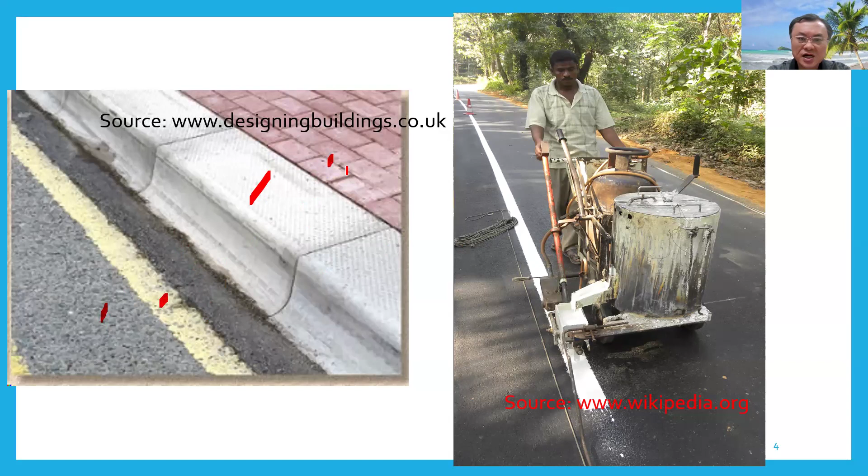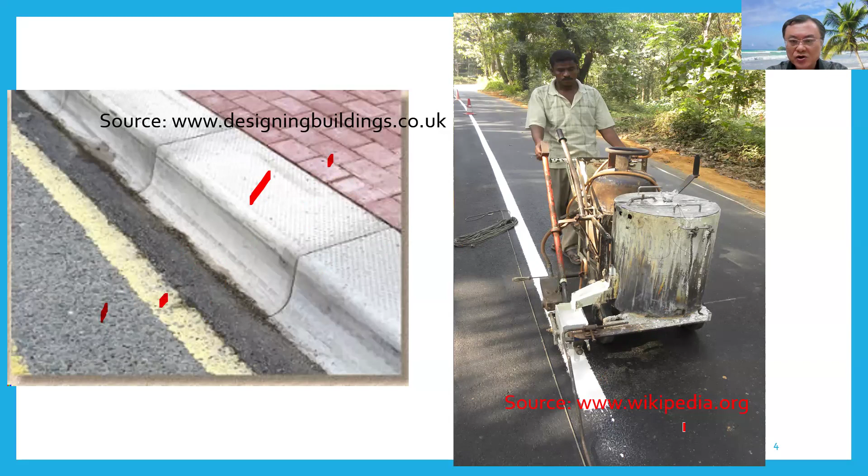On the right hand side, you can see workers preparing the road marking paint on the completed road surface.

On the left hand side, you can see this typical cross section of a normal road. So normally the lowest level is called a subgrade. It's normally the existing ground, provided it's hard enough. If it's not, it will be excavated and replaced with hard materials.

So if that's the case, then it will normally be a thickness of about 150 to 300. We call it subgrade, that's the part of ground where the base, subbase, and asphalt layers are placed on it.

These layers must be very strong because it's going to support all the heavy premix layers and the base course on top of it.

So the next layer will be the sub base course, or we normally call it the base course. The thickness will normally vary from 100 to 300. So the sub base is the layer of aggregate that lies below the base course and usually consists of crushed aggregate or gravels.

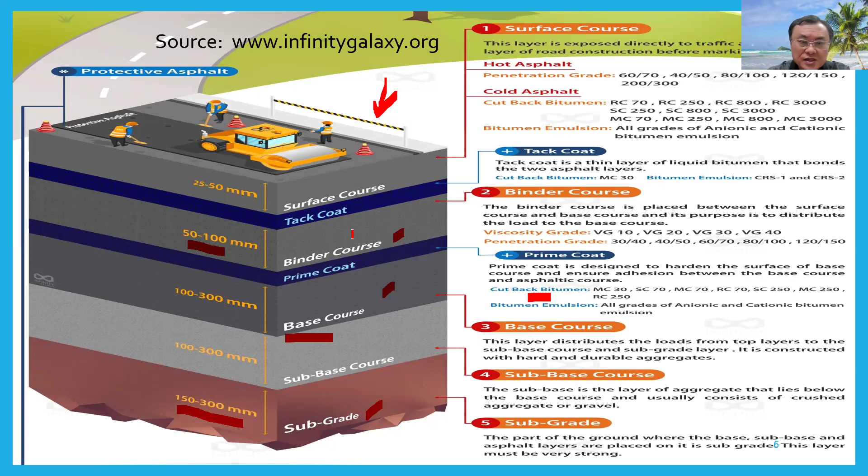So thickness normally varies from 50 to 100 mm. The binder course is placed between the surface course and base course, and its purpose is to distribute the loads to the base course. Normally in Malaysia we use premix, or bitumen mixed with the aggregates, to form this binder course. After this layer is laid and compacted with the rollers, then we lay another layer.

We call this a tack coat. This is also a cutback bitumen. The tack coat is a thin layer of liquid bitumen that bonds the two asphaltic layers, the wearing course or surface course, and the binder course together, so that ultimately they form one cohesive structure.

After the tack coat is laid, you will have a surface course, or in Malaysia we normally call it wearing course. The thickness will vary from 25 to 50, and it could be up to 100, depending on the usage of the roads. This layer is exposed directly to traffic, and it is the last layer of road construction before markings are applied.

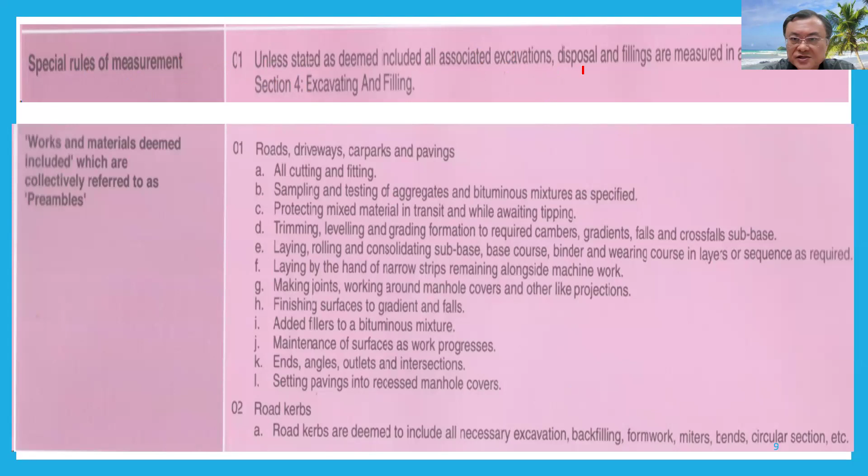For a start, we jump to the special rules of measurement. C1: unless stated as deemed included, all associated excavations, disposal, and fillings are measured in accordance with work section 4, excavating and filling. Then we come to the next section.

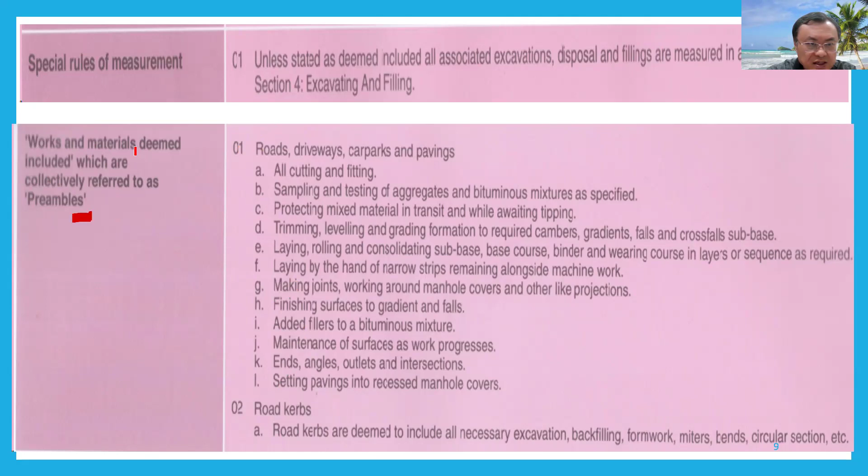Work and materials deemed included, which are collectively referred to as preambles. Meaning, whatever is mentioned here need not be measured in the quantities. The keyword is deemed to be included. I'm not going to go through it, but just roughly mention: it involves all cutting and fitting, sampling, trimming, rolling, etc.

Part 2, road curbs. Road curbs are deemed to include; the word deemed means understood to include. All necessary excavations, backfilling, formwork, miters, miter meaning forming corners, ends, circular sections, etc.

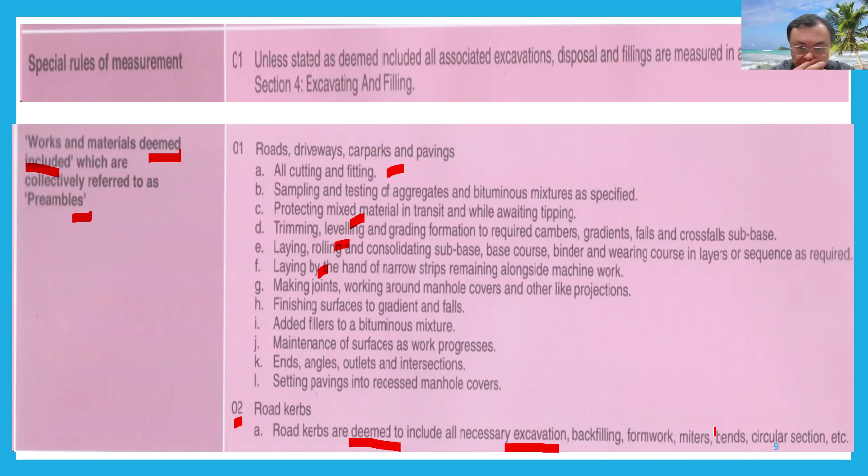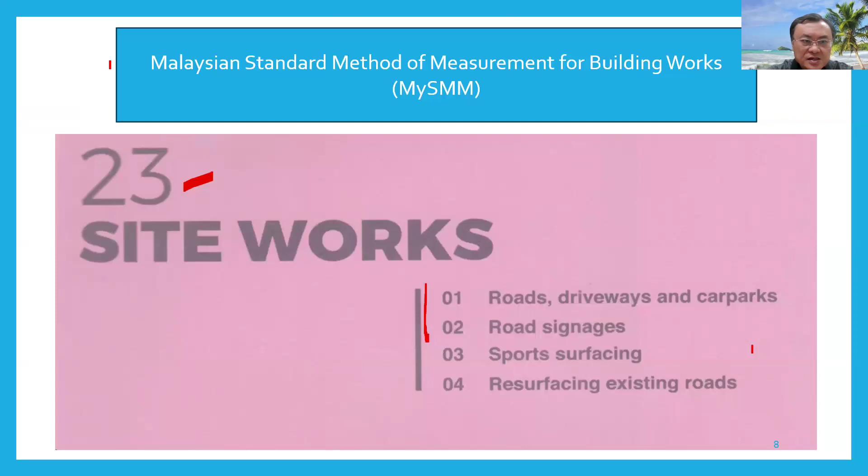You can see here the MySMM is divided into level 1, level 2, and level 3 of division. When we form a description, we make use of part 1, then part 2, then add level 1, level 2, level 3. So here we have 5 levels, but for the code of the MySMM you need 6 levels. The first one will be section 23, so we start off with 23.01.01, etc.

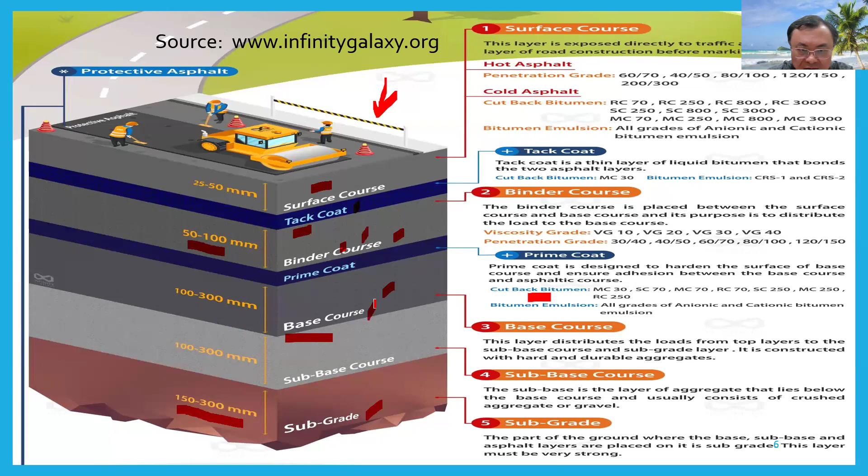Again here I noticed there's a typo, because it says asphalt concrete wearing course, blah blah blah, then at the end including a layer of approved prime coat, which is redundant because we have already measured the prime coat here. You do not measure it one more time. So this is a typo error, and I cancel it off.

Next, under part 10, on the fifth line, it says forming, for the extruded curb, forming outlet opening at center, which means you form an opening at every length, which is not correct.

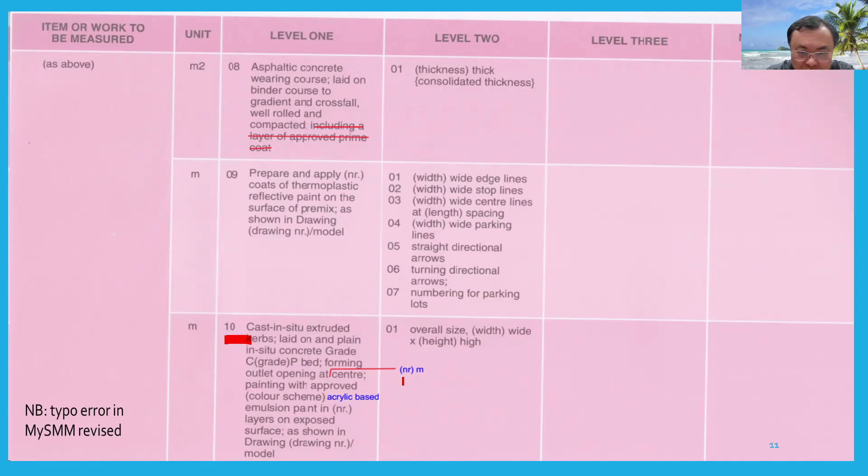Okay, that's why I add in the word number. Okay, meter, meaning you're forming the opening at how many meters centers.

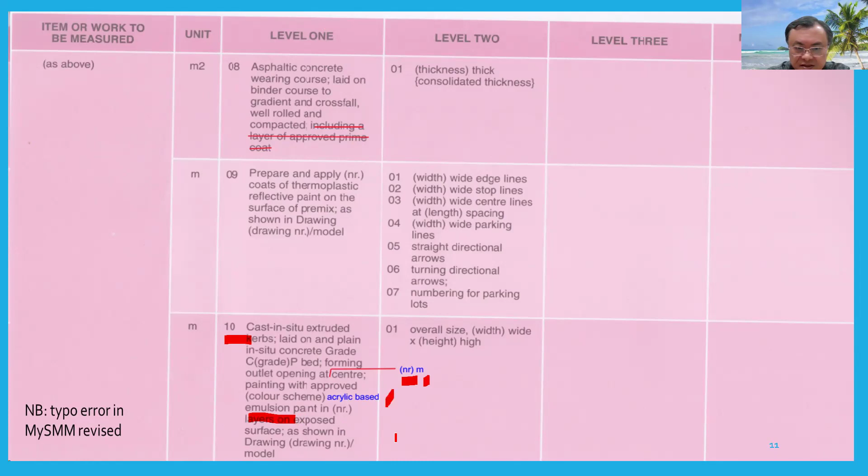Okay. The next thing is the emulsion paint. It just says painting with approved emulsion paint, which is misleading, because emulsion paint has two types. One is the acrylic, which is water resistant. The other type is the water based. For the road surface, you cannot use the water based. That's why I add in the word acrylic based emulsion paint. This will make it very clear for contractor supplies.

Okay, next, again, there's some typo error here. So you can see here, rounded on one edge, cast inconvenient. It should be cast in convenient. The word inconvenient is in convenient, two words. Okay, lengths jointed, blah blah blah. Okay. Same thing here.

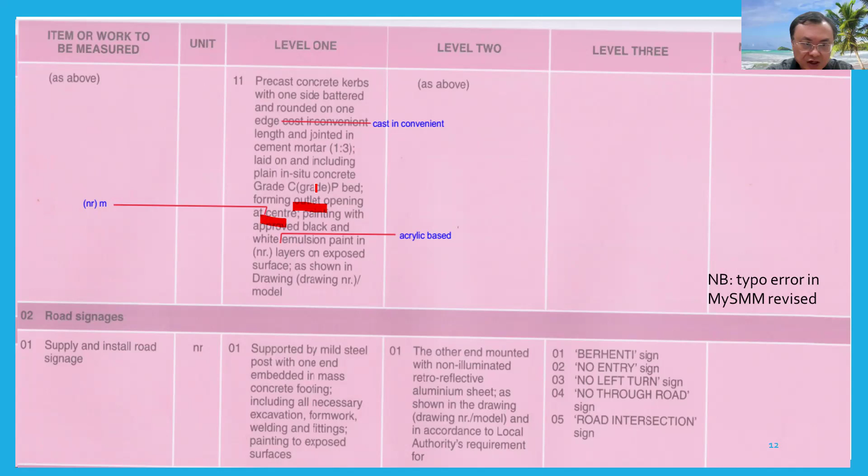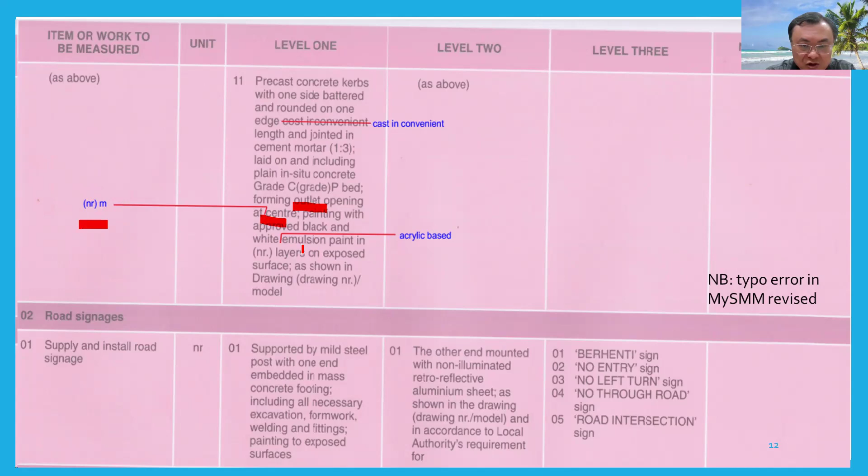Forming outlet opening. Okay, at what center? You don't have an opening at every length of the precast concrete. So I add in that it should be how many meter centers. Okay. So same thing for the emulsion paint. As I explained just now, I clarify it to be acrylic based emulsion paint. All right.

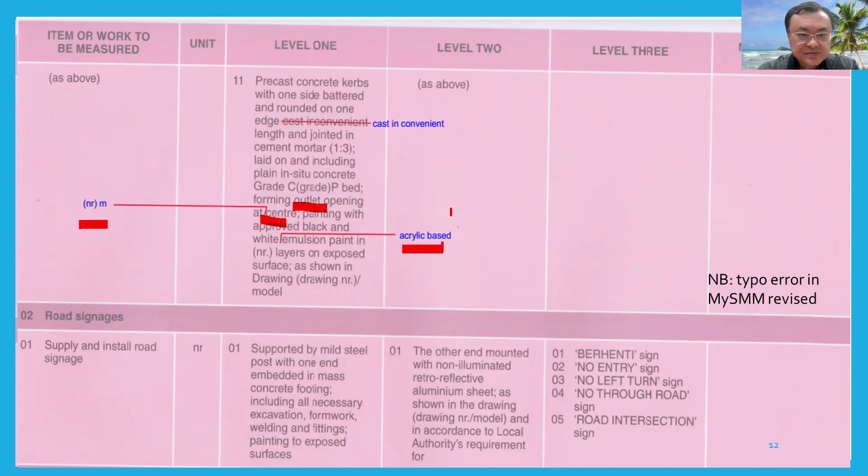So this is the main process that we are going to use. I don't want to go through it, but I will make use of it as I do the measurement. Basically, when we are constructing the descriptions of the measurement for each item, we will make use of this coding. So the first will be the section. Next will be the roads and driveway, part one, then part two. Normally the section name will not be mentioned in the description itself, because it will normally form the element name.

So this will be the unit that we are going to use for each respective item. So let's say, for example, the first item we can use road, driveway, and car parks. Then bulk excavation, blah blah blah. Then follow for the level 2, oversite, everything. So for the third level, there's nothing, so we put the code as 00.

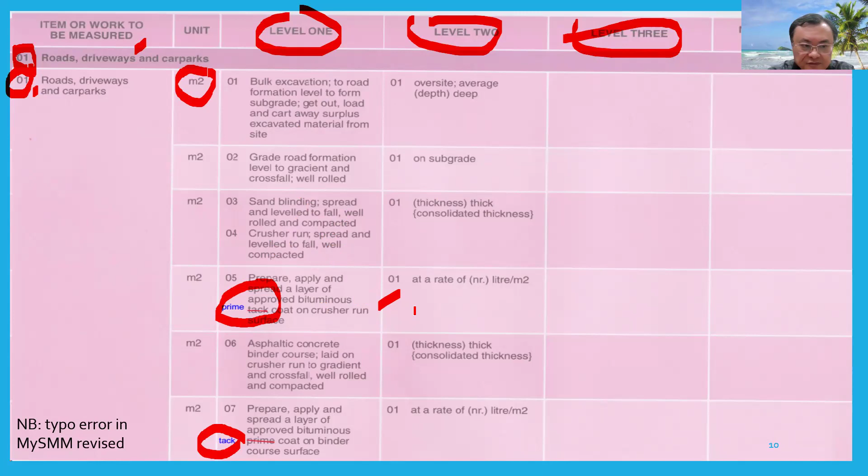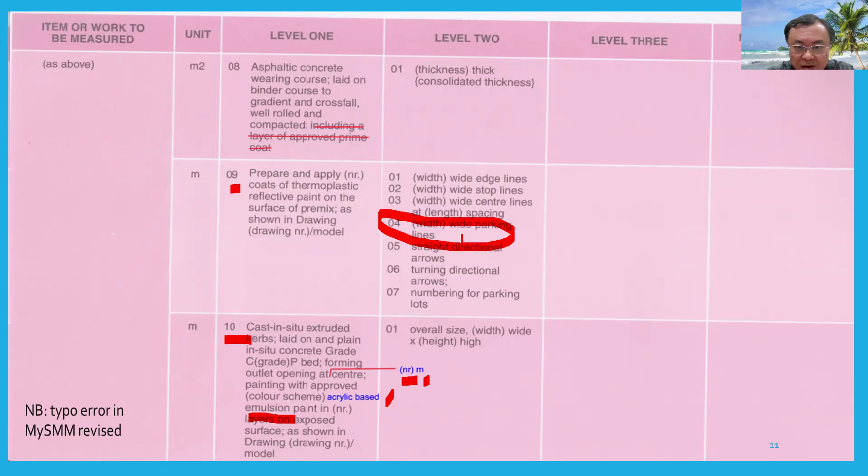So let's continue. I will not go through the individual items, because I believe the wordings are very clearly and easily understood. So I will go through it when we form the wordings of the items itself. So for example, if you want to use this item, you will just add up the above, at 09, then add individual 04 for parking lines, etc.

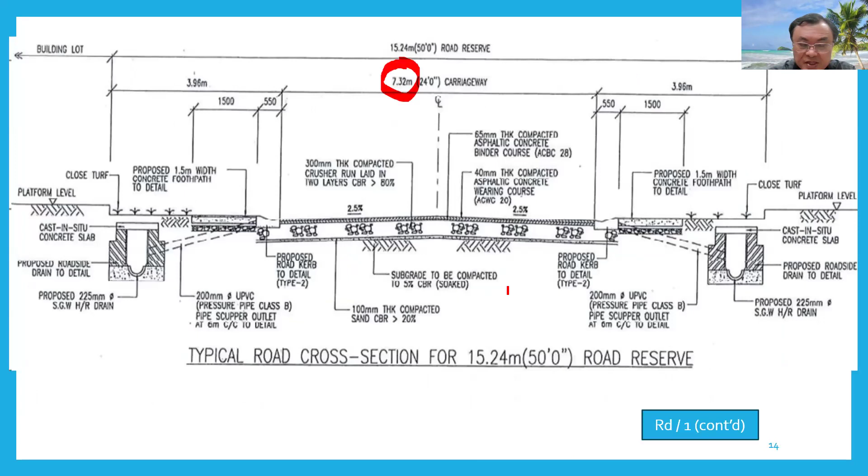So this is a typical cross section of road. You can see here this is the actual carriageway, meaning the actual premix surface, which is this width. So the road sections basically will be the same. It's just the difference in the width of the carriageway and the width of the respective road reserve.

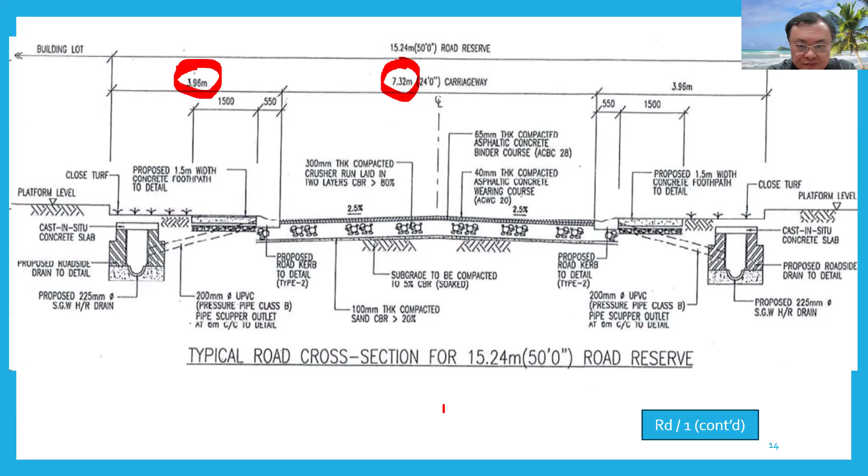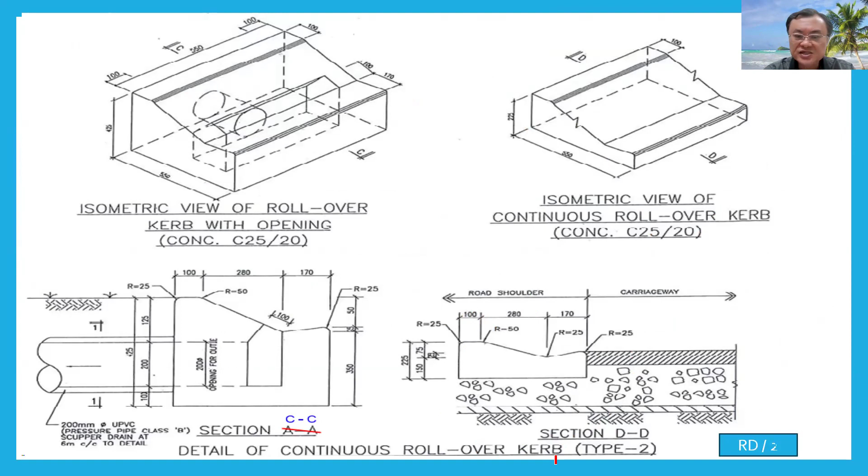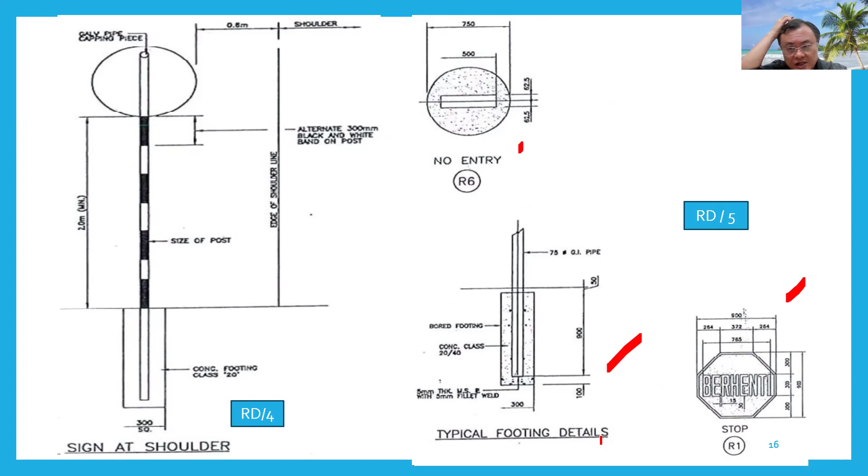Next, what you see here is the typical section of a rollover kerb, meaning the cast in situ road kerbs. What you see here is the standard construction details of a signage, for example, no entry sign, berhenti sign, and what you see here is the typical footing details.

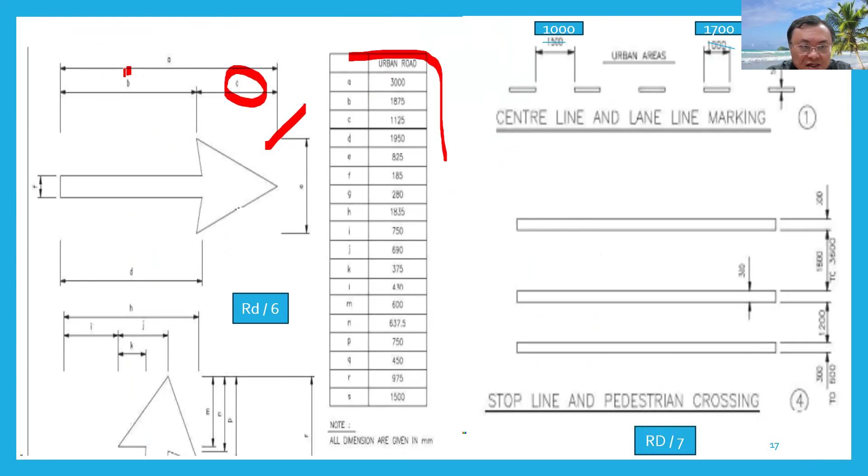So this is the direction arrow that later we're going to measure. This is all the dimensions which you are going to use to form this directional arrow. These are the stop line and pedestrian crossing line, etc. This is the one that we are going to measure, center line and lane marking. Okay, and you can see here.

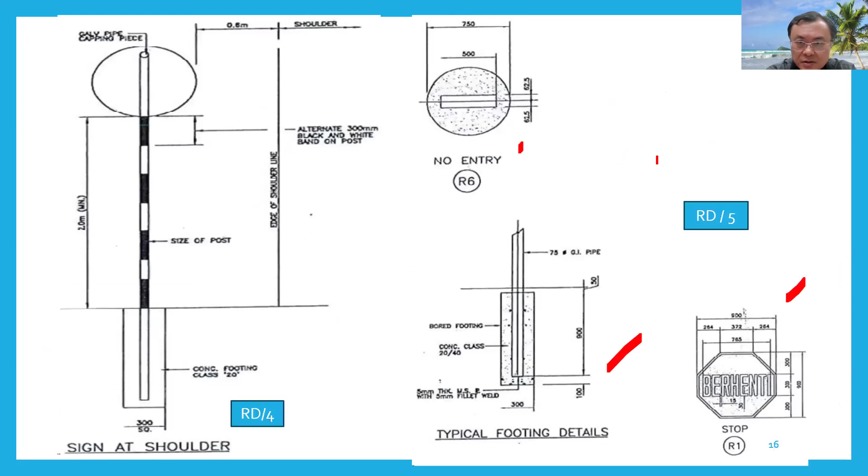Just now on the layout plan, you can see here it shows center line bracket 1000 stroke 1700. You can see here the gap is roughly about half of the road marking. So the gap should be 1000. The actual line over here will be 1700. So that's why I have amended this to reflect what we are going to measure later.

Okay, the gap is 1000. The line is 1700, because over here it is slightly different.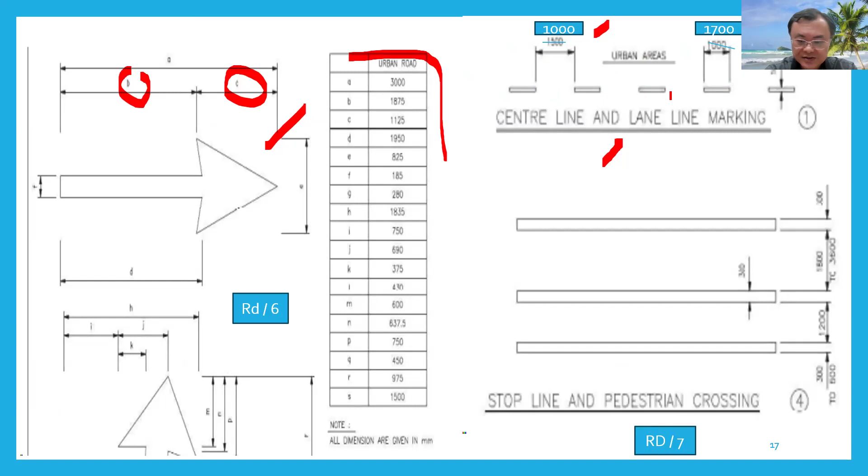Okay. So now let's proceed with exercise number 1. Measure the road between A and B. Normally when we do the, one moment.

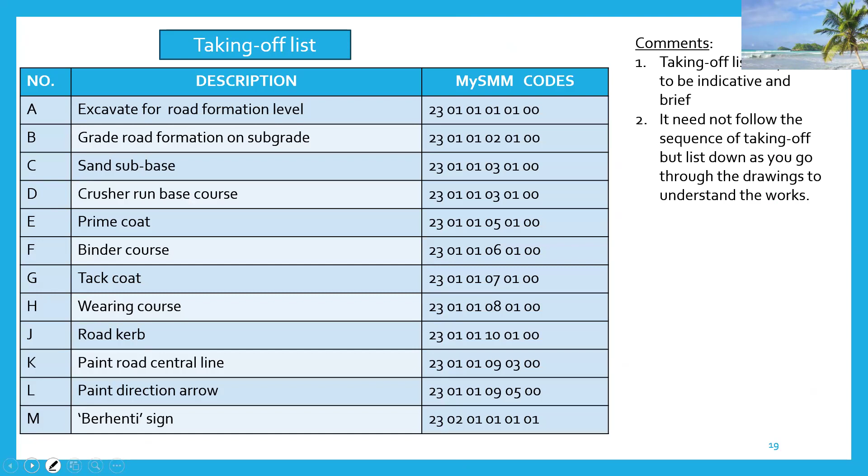Sorry for the interruption, because the computer battery is running low.

Okay, before we do any measurement, we should first prepare the taking off list. You should do this even when you're working, because bosses normally would catch you and ask you where the taking off list is. Basically, the taking off list is a very important thing. It shows your understanding of the measurement steps, and it also shows whether you know what you're doing.

When I'm working, I always try to catch those, especially juniors, to see whether they know what they're doing, by asking them: show me your taking off list and where are you supposed to measure. So the taking off list only needs to be indicative and brief. It need not be the full description. It just indicates what items you're going to measure.

Number 2, it need not follow the sequence of taking off, but list down as you go through the drawings to understand the works. Because for normal construction, you will have numerous drawings. In this case, we are only using about 6 to 7 drawings. Let's say you are measuring construction of slab or RC works, you may be using probably 50 or more drawings, depending on the complexity of the project.

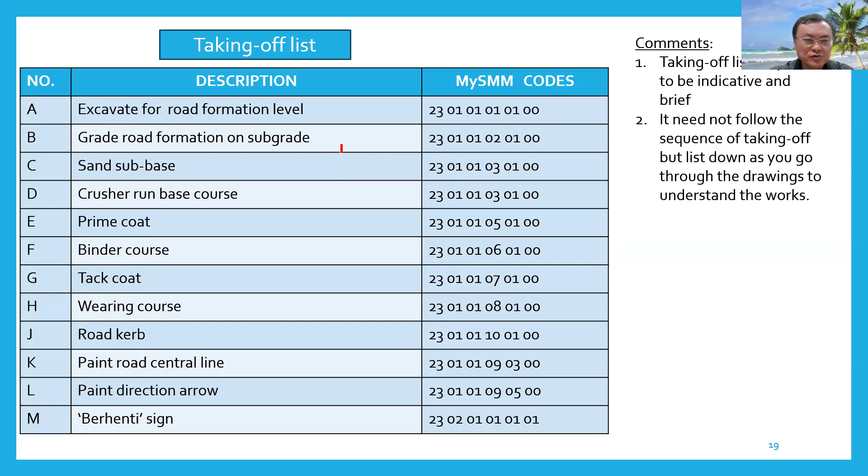However, you can see here I have listed it in sequence, basically because road measurement is rather straightforward. Just from the section, you can see everything. So I just put it in sequence only lah. You can see everything I put here is only brief. You don't have to put in details, but the code understood it must be a premix of bitumen.

Carpet bitumen. So over here, while you are listing down the taking off list, you must also put down the codes as you go. This shows that you know what you're doing. The BQ, MySMM is still new in the industry, so very good chance there will be a separate section in the BQ that lists down the codes, to have double clarity of what items you are measuring. Hopefully this will also avoid disputes in pricing.

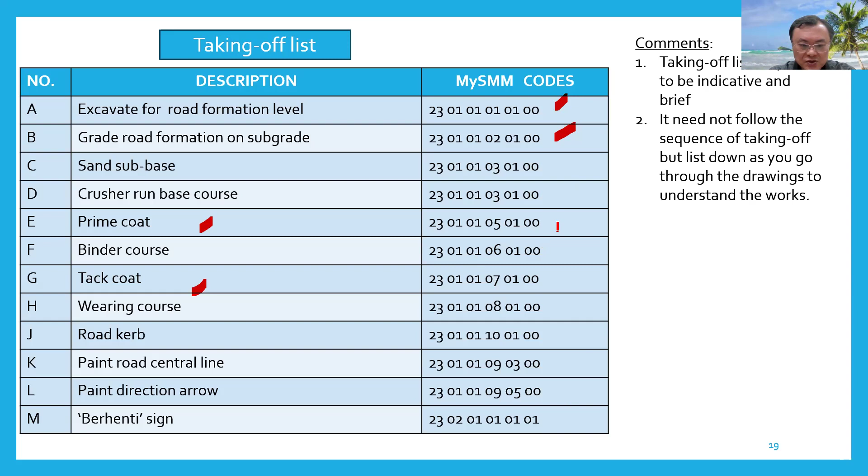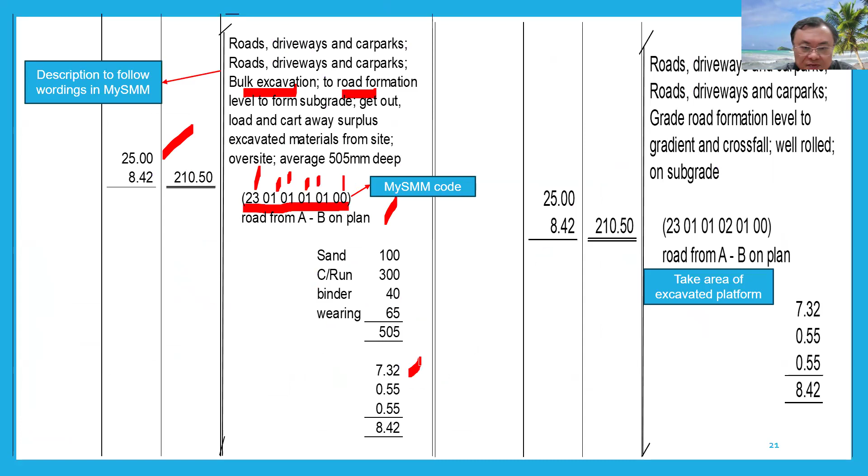So how to get the length? 25 meters is stated in the layout drawings. How to get the width? 7.32 is the premix road surface. 0.55 meters is the width of the in situ kerb on either side. So you form 8.42. You can see here, it's actually stretched from here to here. 7.32, 550, 550.

The depth is the sand thickness, the crusher run thickness, the binder course thickness, and the wearing course thickness. So you get 505. You can see here 100 mm sand, then crusher run 300, then this binder course 65, then this wearing course 40. So you have a total of 505 mm.

And we don't put it in the dimension column because the way MySMM puts it, you're supposed to put this thickness in the description. All right, so we have the first item. So the quantity will be 210.50. As usual, we draw a line after measuring one item and a double line after we get the quantities for this description.

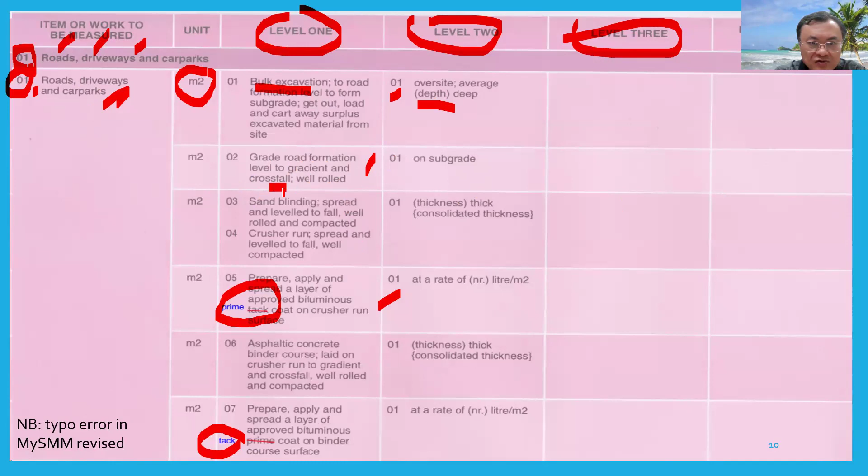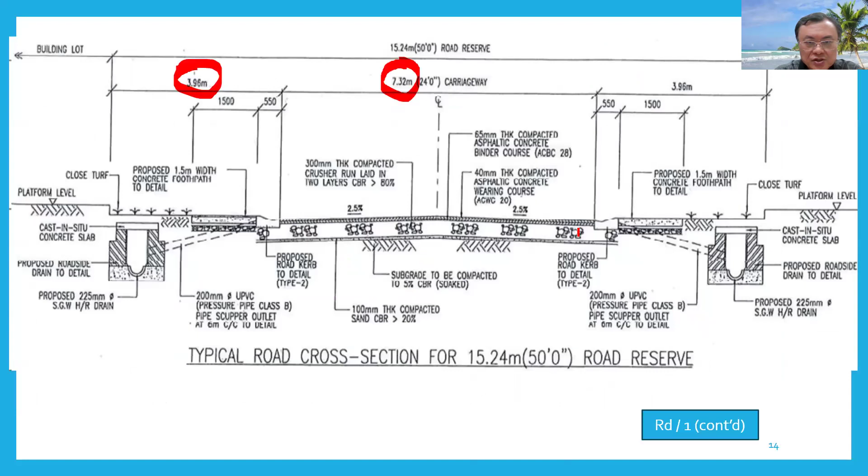So road, driveway, and car parks. Next one will be grade road formation levels to gradient and crossfall, well rolled on subgrade. This one will be blank, so put as 00. So the dimension will be exactly the same as the excavation for the width. It will be the same dimension as over here. All right, same width.

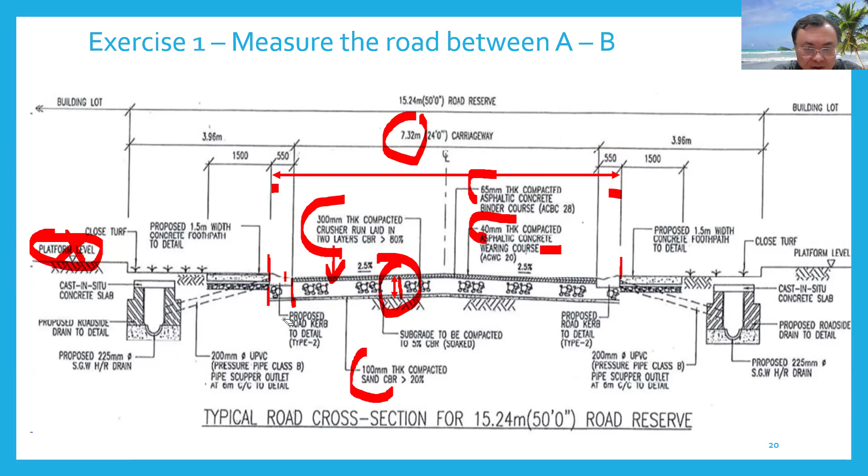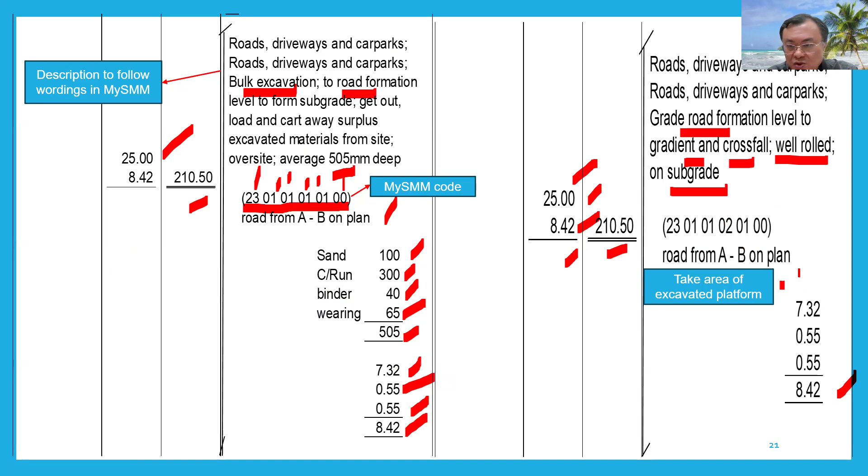Of course, the length will also be 25 meters. So what you have is 25-meter length. The width will be 7.32 plus 0.55 plus 0.55, same as the excavation. But in this case, it's just an area. So you get 25 meters times 8.42, you get 210.50. See the note here? Take area of excavated platform.

So we will stop here because the video is long enough, to be continued in the next part, where I will finish off the measurement for the roads.